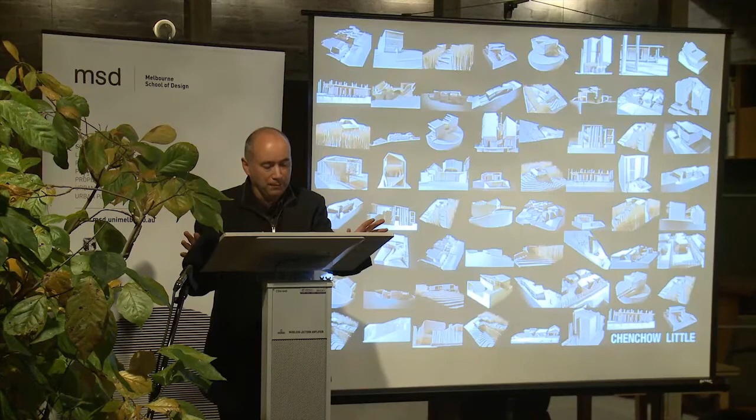Can you hear me? Am I projecting well enough? Yes. Okay.

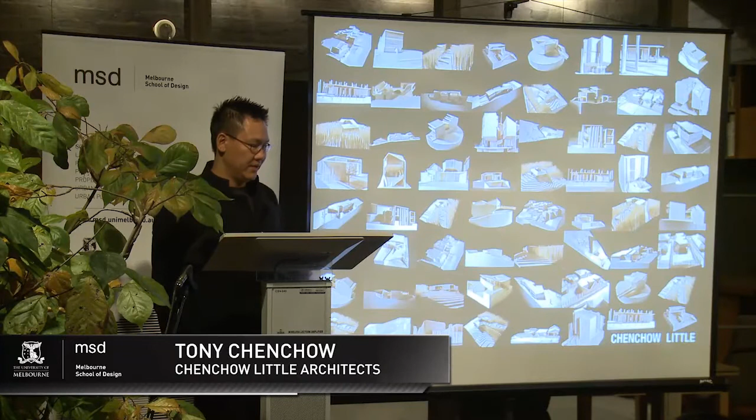I would like to start by thanking Philip Goad for the invitation to be part of the MSD series 2012. It gives me great pleasure to present this talk titled Loopholes, Mutations, Precedents, Three Aspects of a Small Practice. In the interest of finishing on time, I've woven the third topic of precedents in the other sections of the talk.

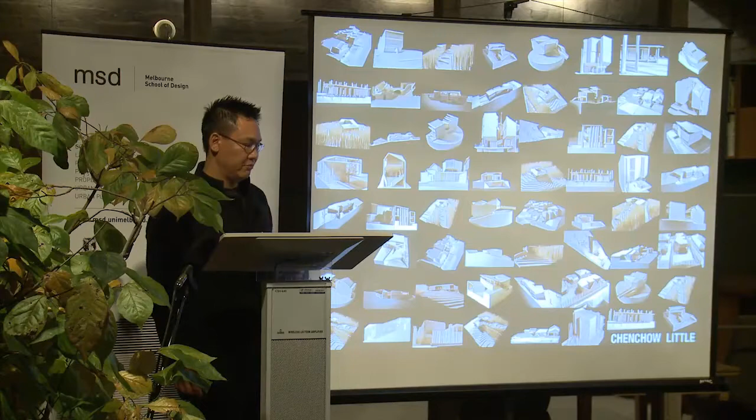Planning codes have played an important role in shaping our suburbs. As the majority of our projects are suburban houses in Sydney, I thought it would be appropriate in this first section of my talk to start with the impact council planning codes have had on our work.

In New South Wales, planning codes are divided into two sets of documents: local environmental plans, LEPs, and development control plans, DCPs. Planning codes are neither neutral or objective. I agree with Elijah Hughes, the editor of Perspective magazine, that codes charged with political, social, and formal intent operate as the architecture of architecture, creating its preconditions and shaping its production.

LEPs gazetted by the State Parliament are legal documents. They typically deal with zoning, subdivision, and heritage items. DCPs contain prescriptive guidelines such as wall heights, setbacks, envelope controls, floor space ratios, landscape areas, private open space requirements, as well as local character statements.

They do not carry the same legal status as LEPs. However, the weight judges in the Land and Environment Court have placed on them has increased over the last 20 years.

DCPs in Sydney have become a vehicle for council to impose and project their ideal visual image of the built environment. They have become de facto design codes.

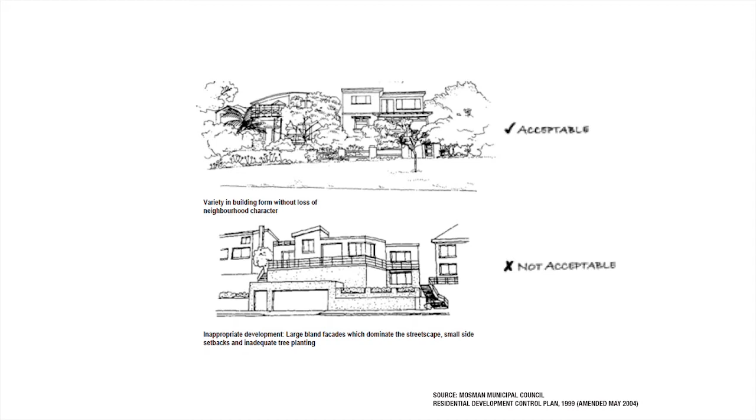Many architects and clients have challenged the codes in the Land and Environment Court. The example of Harry Seidler is well known, but my experience with the Land and Environment Court early in my career was not so successful.

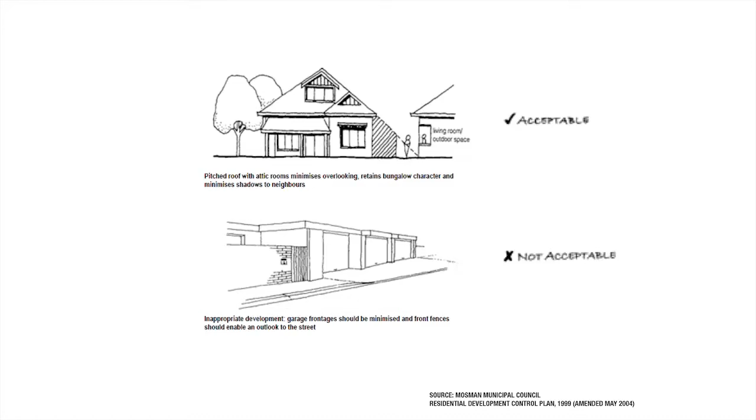I found that consultant town planners on both sides, as well as judges, would make ill-informed design amendments in order to facilitate a consensus. In one case, a judge proudly admitted that he had thought up the solution during his morning shower.

I quickly realised that a confrontational approach with council was not productive.

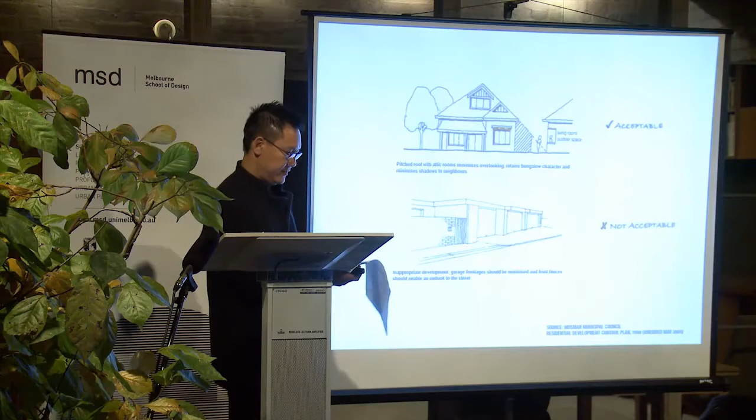We then tried to comply with the objectives of the code. In doing so, we made minor breaches in the numerical standards on the basis of compliance with the code's objective. This approach wasn't very successful either, as the planners were interested in strict compliance with the numerical standards.

We recognised that we needed to change our tactical approach. Rather than a confrontational approach emerging from a default reaction that planning codes restrict creative expression, we began to approach planning codes obliquely as a way of moving forward, trying to find openings in order to clear a conceptual space for design creativity.

In these four projects, we began with a careful reading of the codes, tabulating council requirements in order to locate points of complication.

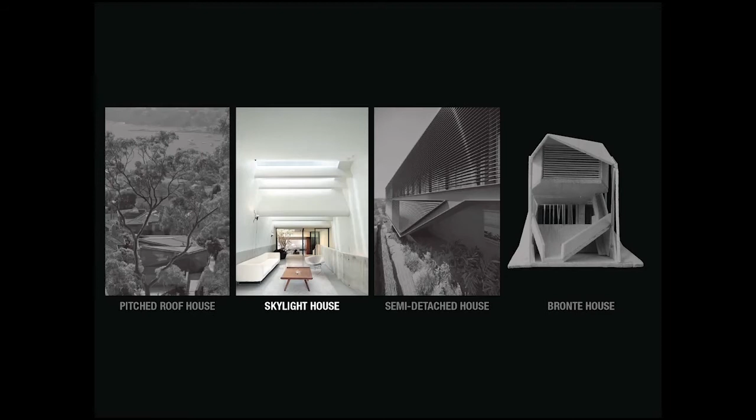In the Pitched Roof House, we highlighted the disjunction between council's ideal image and the written code. In the Skylight House, we changed the frame of reference and thereby overcame a previous assumption. In the Semi-Detached House, we looked at definitions in order to locate gaps in the way things are classified, as well as changing the frame of reference.

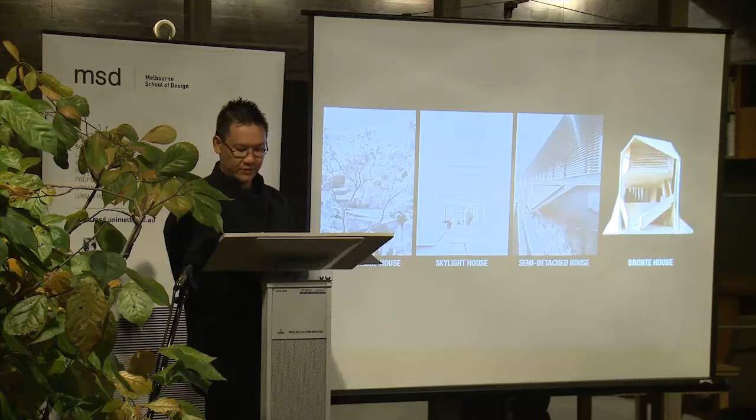And finally, in the Bronte House, we accepted the codes on face value and used them literally to generate a built form that was not previously imagined by council. Codes are therefore explored for their creative potential and as a vehicle to investigate contemporary architectural concepts.

In the Pitched Roof House, one aspect of the planning codes became the all-encompassing rationale that propelled the design beyond the rational limits of the code's original intent, a form of hyper-rationality. As Joshua Prince-Ramus states, a hyper-rational process takes rationality to an absurd level. It transcends all the baggage that normally comes with a rational conclusion to something.

Mosman Council is one of the most conservative councils in Sydney. Council planning staff indicated that the site was located in a very sensitive area and that compliance with the code, especially setbacks, view loss, and roofscape, will be important to obtain a planning approval.

A major component of the code required pitch roofs, as they were the predominant roof type of the area. This requirement is mentioned six times in the DCP under three different headings. The code even indicates that council may consider pitch roof forms to extend beyond the maximum building height, where the consistent pitch roof style is an important character element.

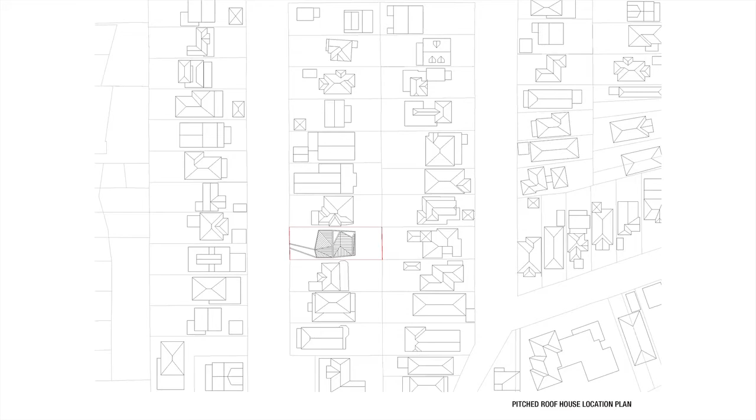Our response was to play with the disjunction between council's idealised image of the pitch roof expressed in words and the contemporary interpretation of a pitch roof. We realised by creating a point of complication, or conjuncture, we could comply with the codes and be able to explore contemporary design concepts. We proposed a roofscape that was made up of a series of triangles that not only pitched up, as in a traditional pitch roof, but also pitched down to form a faceted roof plane.

The scaling of the triangles was important, as we wanted to maintain a scale that was compatible with the neighbouring pitch roofs. This was essential, as there was a fine line between creating a roof form that integrated into the suburb's existing roofscape, while at the same time being an invasive modification of a traditional pitch roof.

Manipulating the faceted roof plane was not just a contextual or a formalist exercise. Other parameters needed to be addressed: the requirements for northern sunlight and the need to merge the roof with the orthogonal roof plan below it.

Surprisingly, the variability of the triangular geometry gave us freedom to push and pull the roof form as required to suit the various parameters. The triangular roof points align with the points of the orthogonal plan. The ridges and valleys follow the alignment of the sliding doors, so they slide without the use of horizontal transoms. Portions of the triangular roof were left out to allow sunlight into the north-facing courtyard.

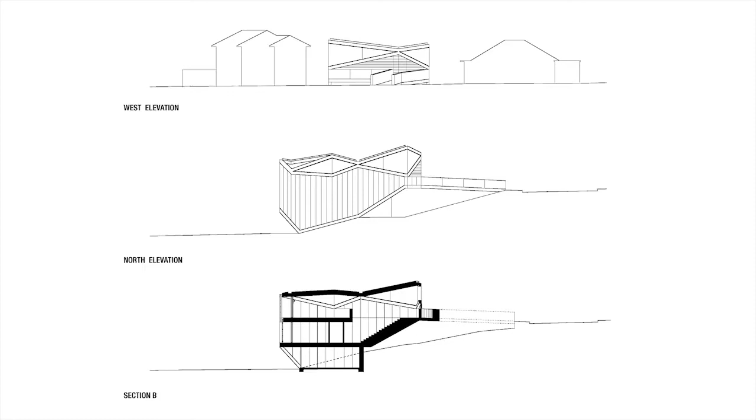The most important architectural move during the design process was to continue the logic of the triangular geometry from the roof onto the front and side elevations. The geometry became the basis for articulating openings along the side of the building.

The structural beams follow the geometry of the roof, continuing down along the facades. We realised that structure could also be a spatial device to organise the external and internal appearance of the house. Structure moves into the realm of ornamentation.

Sectional balsa wood models showed us that by highlighting diagonal beams, they became a strong graphic device that distorted the perspectival depth of the space. For example, the triangulation of the roof plane continues onto the wall, distorting the horizontal and vertical plane of the space.

The diagonals along the facade elongate the perspectival depth, while the triangulation of the corners flatten the perspectival depth. The plan form was fine-tuned to accentuate the aperspectival space.

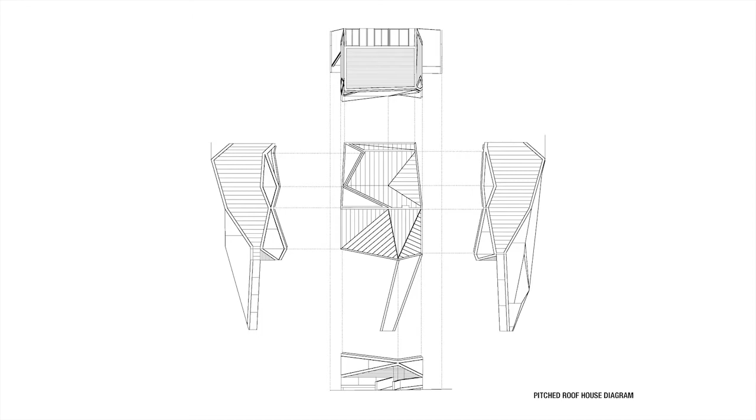The kink form also played on the disjunction between council's objectives of the code and the prescriptive requirements. The code required the setback to increase as the wall height increased. On a sloping site, council's prescriptive requirements resulted in a wedding cake form in both plan and section.

Rather than accepting the prescriptive building form stipulated by council, we splayed the building in plan and elevation. This not only avoided the dreaded wedding cake form, but allowed us to look at the building as a three-dimensional faceted object.

You can see from the design process of the pitch roof house how seemingly benign council code requirements have become a generator of ideas and concepts crucial to the final outcome.

The Skylight House plays on council's obsession with returning the front facade to its original appearance. Leichhardt Council is the only council I'm aware of in Sydney that has an in-house lawyer present in planning meetings.

The lawyer pointed out that an approval would not be granted unless the facade was rebuilt to the drawings of a heritage architect. After seeking legal advice, we realised that it would be more expedient to defer to Council's demand.

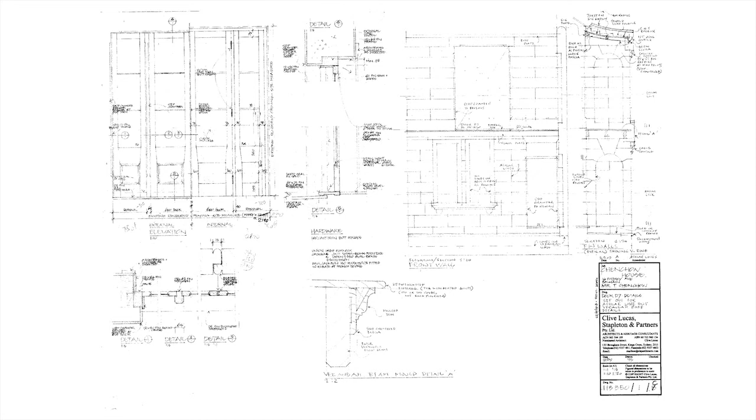The folded roof plane that delineated the internal spaces and formed a distinct skylight profile became visible from the street and the neighbouring houses.

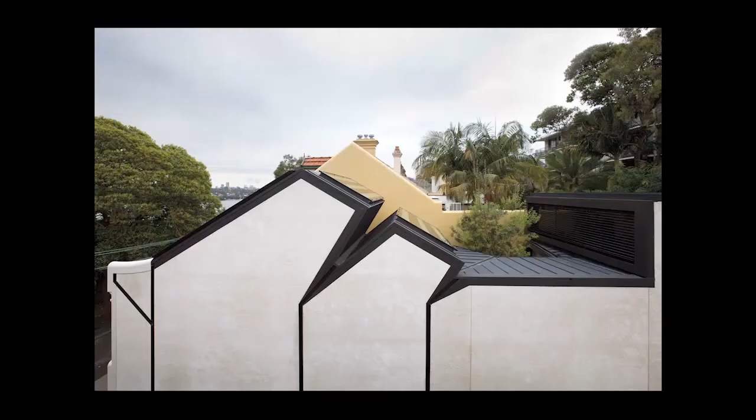This was explained to Council as a simple cutout along the side elevation that reduced the bulk of the building. Council surprisingly accepted the explanation.

The wall and roof cappings read as dark lines highlighting the skylight funnels and downpipes.

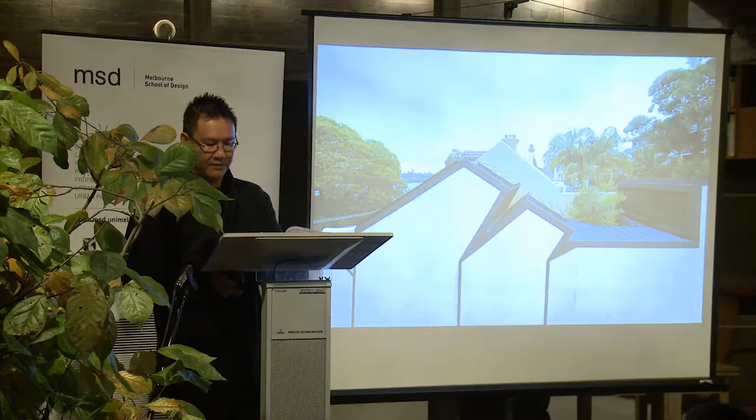The detailing of the wall capping and the ridge was an important element for integrating two heterogeneous elements, the side elevation and the facade. The side walls were finished using a stucco render rather than a flat render to continue the differentiation between the front elevation and the side of the house.

The height of the new wall capping matches the height of the original parapet of the front veranda. The zinc capping is folded up at an angle of 45 degrees to assist in weatherproofing and to form a small wing-like element.

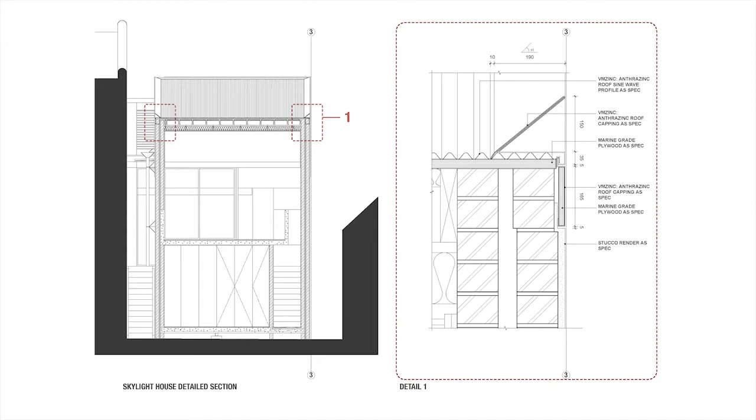This element continues across the ridge to act as a transition between the corrugated profile of the front roof and the standing seam profile of the rear skylights.

It was at the scale of the detail that we were able to reinterpret the historical front facade. The subtlety that was required to work at this scale gave us the ability to position the front and side elevations as equivocal and reciprocating elements.

Even though we deferred to Council with the front, we nevertheless wanted to create a building that at first glance may seem to fulfill Council's requirements. But if one was to take a closer look, they would notice that all is not as it seems.

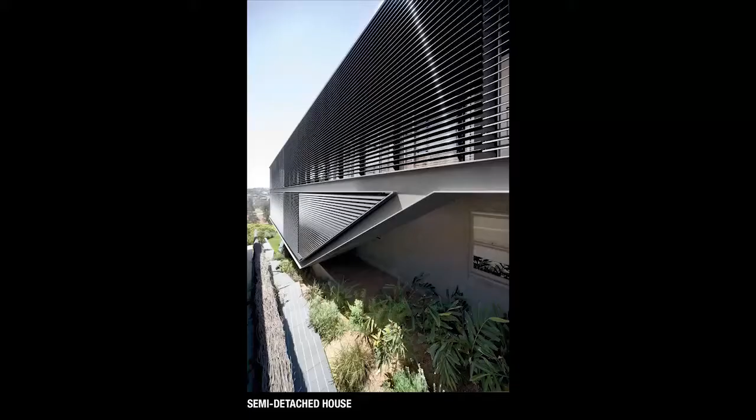In the semi-detached house, we played a game with Council's floor space ratio and the visual impact codes. The client is a merchant banker who wanted maximum return for his investment. He believed the best way to do this was to maximise the floor space.

The neighbouring semi established the volume of the proposal, as Council planning codes require semi-detached houses to be mirrored. The floor space ratio code was stringent, so our approach was to maximise the external spaces, as they were excluded from Council's calculations. Although we mirrored the enclosure of the building, we added a layer of external spaces around it to dramatically increase the perceived and usable space of the dwelling.

We began by removing the existing roof structure and the rear portion of the top floor. The existing sandstone basement and rough cast render base containing the bedrooms was retained.

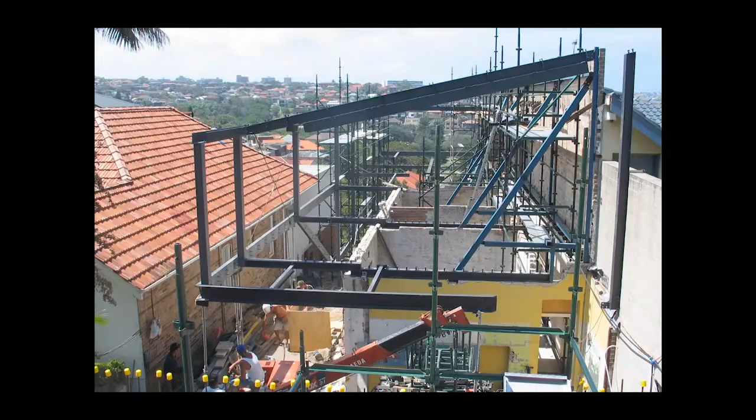We then grafted a new steel superstructure onto the existing base. The superstructure cantilevers past the base and contains living rooms, kitchen, master bedroom and extensive veranda and courtyard spaces. The kink form of the structure expresses a continuous external circulation linking the street entry to the rear garden below.

By positioning the external aluminium louver suite on the outside of the verandas and continuing the roof plane over, we created an interstitial space which dramatically increased the perception of the space while not being classified as floor space. The area of the interstitial space of the house is over 100 square metres, which adds 30% to the overall floor area of the house.

The council has since closed this loophole. Decks over 20 square metres are now counted as floor space.

The interstitial space helped us to strategise an alternate spatial model for a traditional semi-detached house typology. The space is made up of two operable layers. Each layer offers specific environmental, structural, spatial and aesthetic solutions. Here, aesthetics, sustainable and spatial considerations are inseparable.

Council stipulated that the facade cannot be longer than 12 metres without articulation. Council highlighted that window openings, changes in materials, and stepping of the wall plan in plan and section were acceptable forms of articulation.

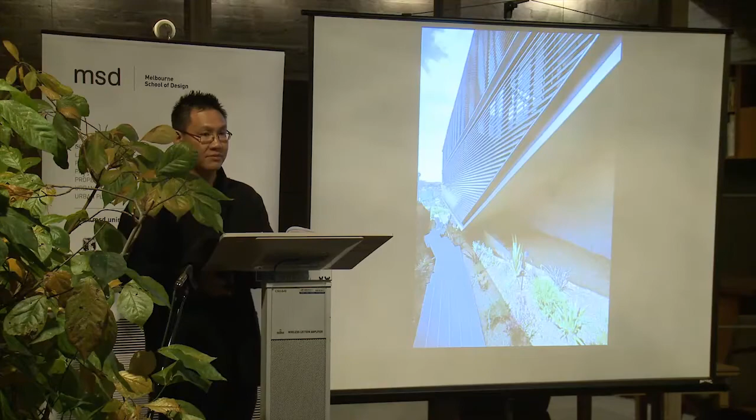We showed and explained images of Herzog and de Meuron's Ricola storage warehouse and Zumthor's shelter for Roman ruins, and finally managed to convince the planners that the two forms of abstraction were a difference in degree rather than a difference in kind. The two forms of abstraction were not opposites, but could be seen as an extension of each other.

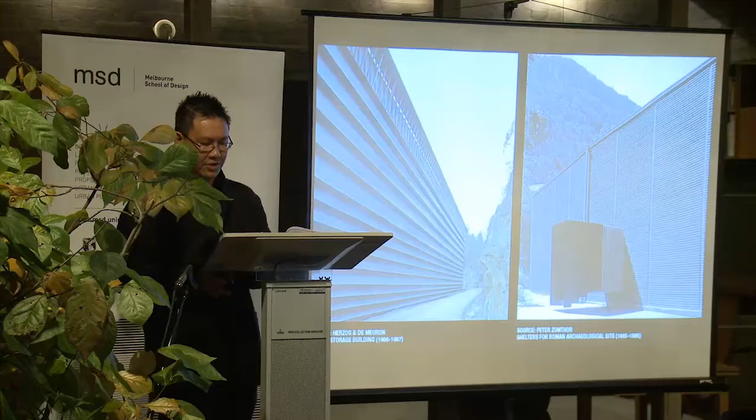Material abstraction emphasizes the capacity of the material to generate effects rather than the intrinsic nature of the material. This will be achieved through detailing and repetition to modulate the scale and intensity of the facade.

In the semi-detached house, material abstraction is explored by positioning the horizontal steel members and the louver blades in front of the columns to privilege the horizontal.

The edges of the louver blade are detailed to align with the flanges of the PFC. The PFC was painted the same colour as the louver blades to reduce them to the same visual order.

The viewer then reads the repetitive horizontal louvers in relationship to the flanges of the horizontal members and experiences the facade as a textural surface.

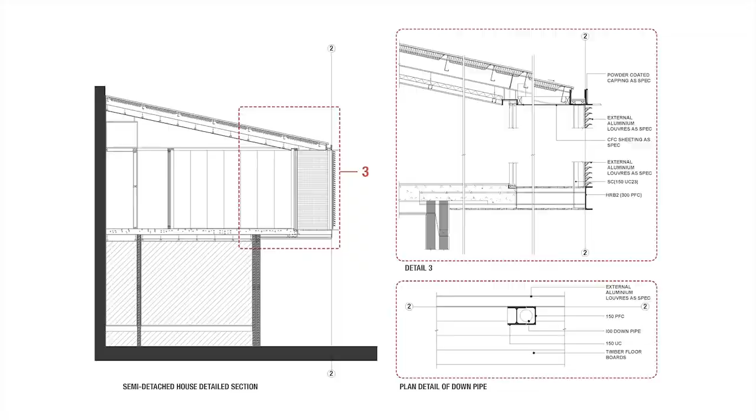To further reduce the image to an abstraction, scalable elements such as gutters and downpipes were incorporated into the steel beams and columns.

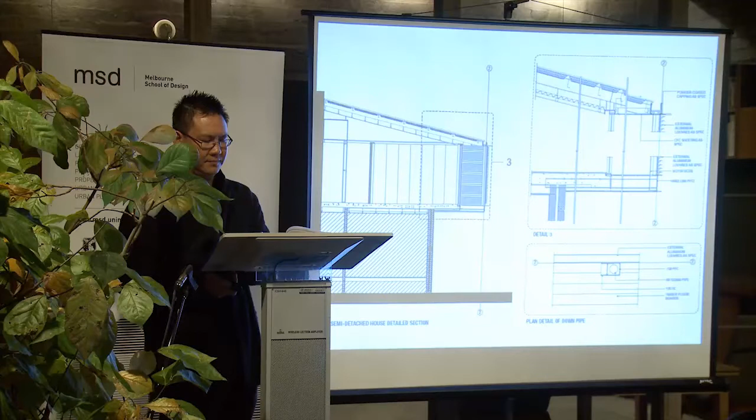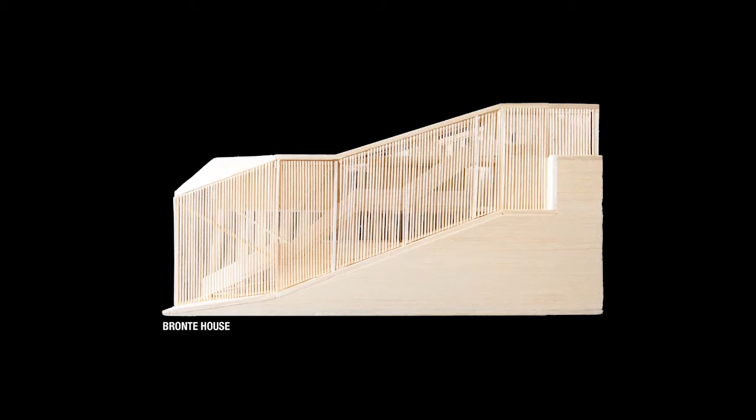In the Bronte House, which has just been approved by Council, the form of the house is a literal interpretation of Council's planning codes. The volume of the house is determined by the maximum permissible height, width and length.

The parapet line runs precisely 7 metres above the natural ground level along the length of the building. Where the wall height exceeds 7 metres at the end of the building, the wall tilts back and changes the material so it is classified as part of the roof plane.

Bedroom volumes have been inserted within the maximum building envelope, and the gaps between them permit natural light into the centre of the long, narrow space.

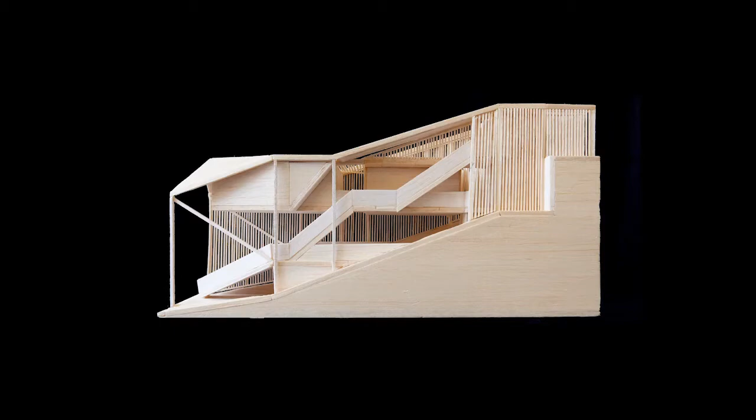The Bondi House continues our exploration of material abstraction. Here material abstraction is achieved by translucent glass panels set between closely spaced vertical glazing mullions, which provides the side of the house with diffused natural light. The vertical mullions and the supporting structure are designed to have the same visual order.

The elevation of the backyard registers the cross fall of the site and the impact of the envelope control. In the Bondi House, we have accepted the codes on face value, but have used them to generate a building form not previously anticipated by Council.

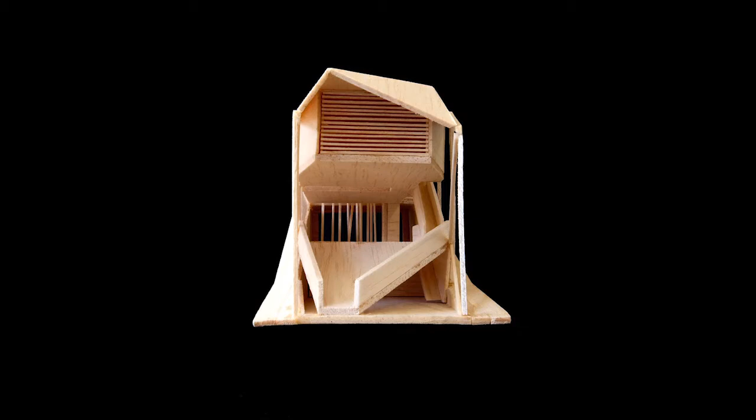Dr. Stan Fung of University of New South Wales offered the following analysis of our thinking. At one level of thinking, the fight against explicit requirements of the code leads us to focus on the ambiguities in the words of the code or in the relevant methods of reckoning and calculation.

At another level of thinking, the fight against implicit preferences of Council led us to form a rhetorical play in which we work with very specific gaps between the denotative, connotative, and metaphoric dimensions of key words, such as material abstraction. The crux is to apply a label that links council's design fetishes or values to a design decision or effect.

On a third level of thinking, consideration is given to the literal compliance of numerical codes. Here the aim is to give the appearance of total capitulation to the codes, while keeping one's eye firmly on the gap between the intents and the wordings of the codes.

These levels of thinking are relatively independent alternatives to each other, and are sometimes pursued simultaneously on an ad hoc basis as situations arise. Once engaged, the thinking is turbocharged by something akin to what Joshua Prince-Ramus calls hyper-rationality. The logic of thinking is projected relentlessly in a literal and straightforward way.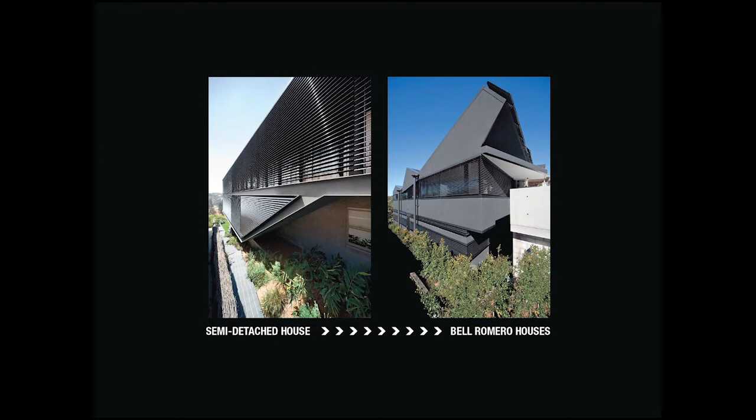The Romero houses are a mutation of the semi-detached house. The client for the Romero house engaged us after reading an article about the semi-detached house in Monument magazine. They wanted to duplicate the semi-detached house as they were proposing a new semi-detached development on their site.

The Romero houses are located in the same local council as the pitch roof house. The main triggers for the mutation were the conservation streetscape and changes in the environmental rating tool, BASIX.

The tug of war with the client started early in the design process. We initially presented the sketch design to the client without a central courtyard to address their tight budget. The client was very upset as the semi-detached house had a courtyard and they believed that their development would not be the same without it.

They also wanted to keep the horizontal louvers, dark grey exterior and end decks.

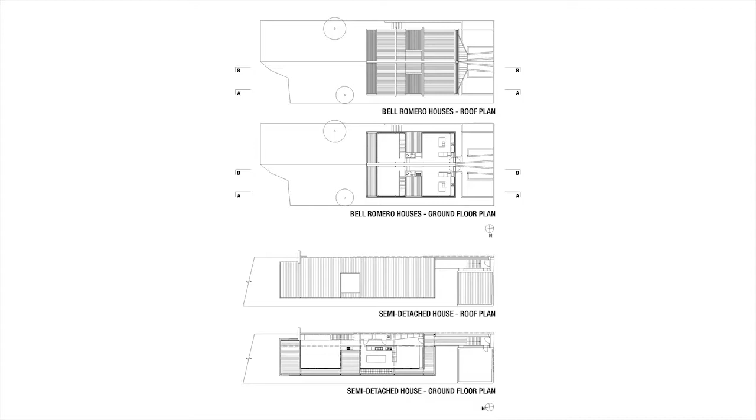We did, however, convince them to explore an alternate roof form. We explained that unlike the semi-detached house, where the roof form needed to mirror the neighbouring semi, we now had the opportunity to build a completely new roofscape.

We played a similar game with the roofscape as we did in the pitch roof house, but because the site is located on a conservation streetscape, it resulted in a different solution. The roof form is designed as a series of connecting gables reflecting the predominant roof type of the area.

We developed a strategy in section, where the interconnecting gables are experienced internally as a folded roof plane that zigzags down the site. We integrated split-level floor plates into the section to prevent the rear portion of the house from breaching the maximum wall height.

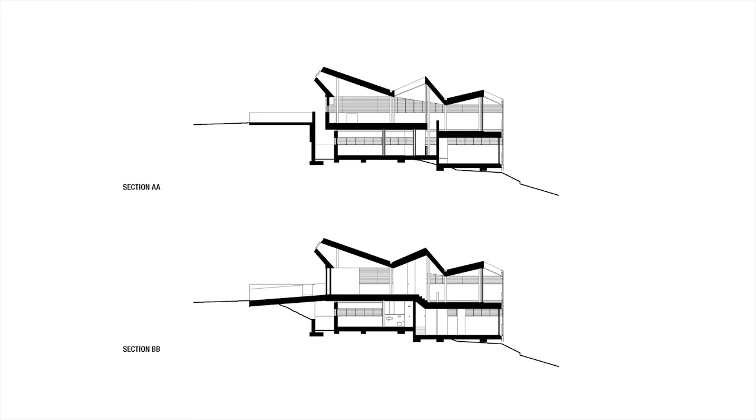From the street, the dwellings were designed to continue the step form of the neighbouring houses. We've reinterpreted the traditional gable as two louvered west-facing skylight funnels pitched towards the street.

Changes to BASIX meant that we had to reduce the amount of glass in our designs. We couldn't replicate the layered facade of the semi-detached house as it required too much glass. We had to develop a new facade system that considered the inclusion of solid walls and also took into account the split-level arrangement of the houses.

The aim was to explore the affective potential of integrating solid sections into a louvered facade to elicit a singular and clearly defined expression. We developed a system of solid and translucent horizontal banding along the facade, which disguises the location of the split floor plates, courtyards and decks.

The banding provides a scaleless and consistent graphic device across the exterior of the building. The louvers are detailed flush with the solid bands, hiding the internal supporting columns. This privileges the horizontal and heightens the sense of lightness.

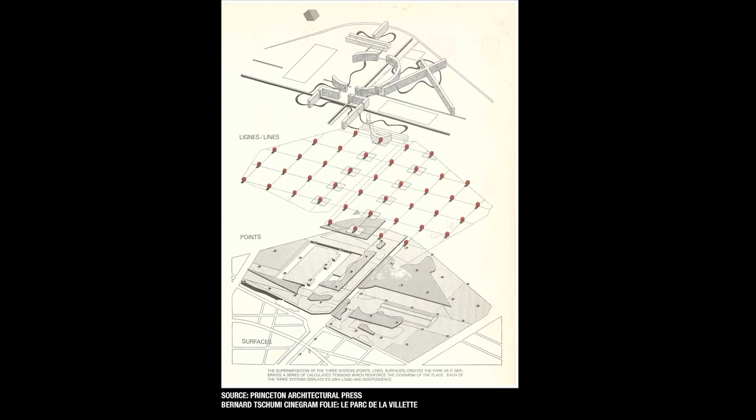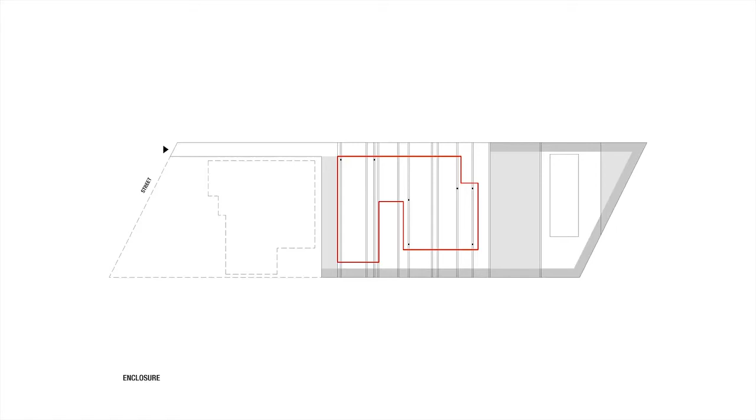The third layer is a series of glass sliding doors that delineate the actual enclosure of the house. They are arranged around a north-facing courtyard. The doors are able to open from the corners and be configured in multiple combinations and permutations to allow a variety of circulation patterns across the whole site.

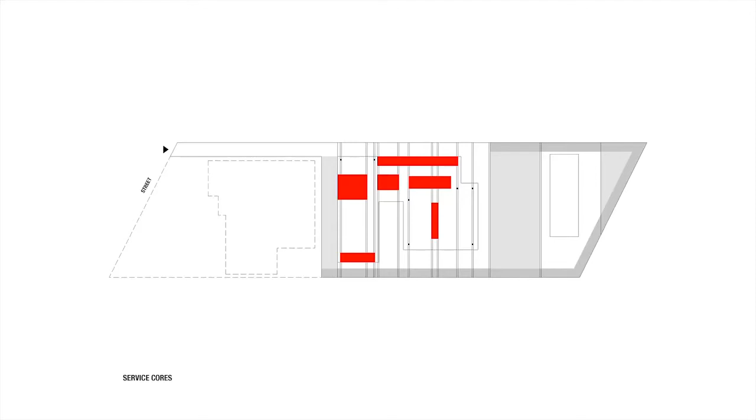The fourth layer is a series of cores containing a powder room, kitchen, bar and staircase that spatially delineates the ground plane. The cores are clad in timber veneer, so they are interpreted as joinery items, disguising the fact that the cores also act as load-bearing elements.

We arranged the cores to encourage circulation patterns and spaces to flow and orientate not only along the site, but also across the site.

When you enter the house, you're obliged to turn several times around the cores. The view of the garden and living spaces gradually unfold with each turn. This type of planning departs from a traditional suburban house layout by offering a systematic multiple paths along the ground plane, rather than a singular defined corridor.

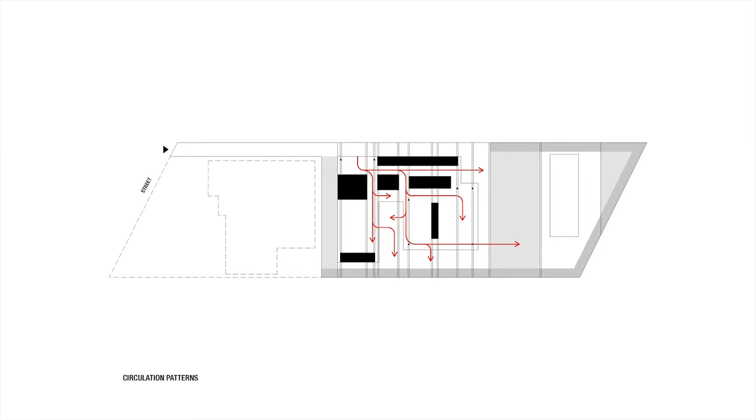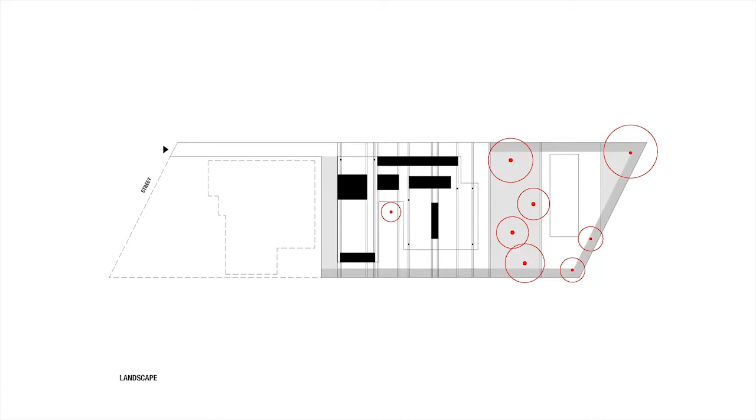A Japanese maple tree was positioned in the centre of the house. The client specified the tree specially to register the change in seasons.

The sixth layer is a series of curtains that follow the alignment of the enclosure. Depending on the arrangement, the curtains modulate the degree of enclosure of each space, and the enclosure's relationship with the garden, as well as other spaces across the courtyard. This addressed the client's brief for a continuous space that could also be compartmentalised.

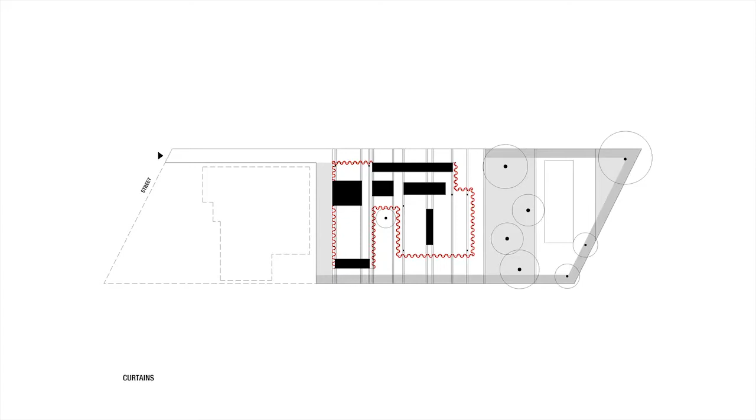The final conceptual layer is the bedroom volume, which floats above the abstracted ground plane.

The Freshwater House is a mutation of the Szirtes House. The clients for the Freshwater House visited the Szirtes House and wanted to replicate the planning as it provided adaptable and permeable living spaces. The triggers that mutated the Szirtes House into the final Freshwater House design were the topography of the site, ocean views, the public nature of the site, and the planning precedents set up by the neighbouring properties.

The site slopes up from the street frontage and has a steep crossfall. This enables the house on the site to view not only back over the street frontage, but also over the side of the neighbouring houses.

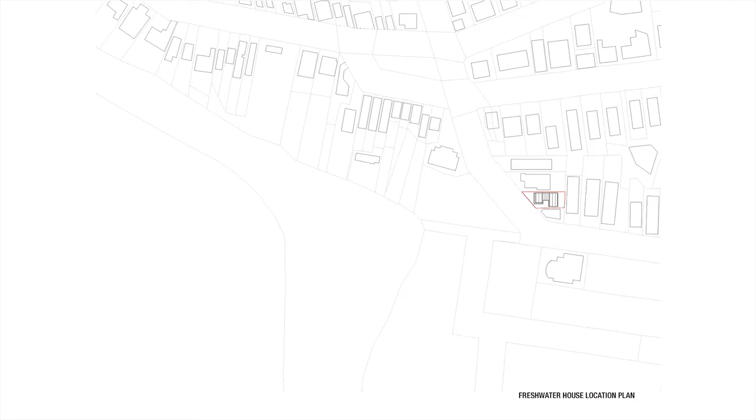Council had recently approved 2 new houses on either side of the property that dealt with the sloping site by designing a podium to artificially level the site. We continued the podium into our design as it provided a solution that would help us adapt the Szirtes House to the sloping site.

The design of the Freshwater House had to address the double orientation and the northern sun. The service cores were repositioned from the Szirtes House to respond to this. The planning strategy was flexible and easily modified to suit the specific new site conditions.

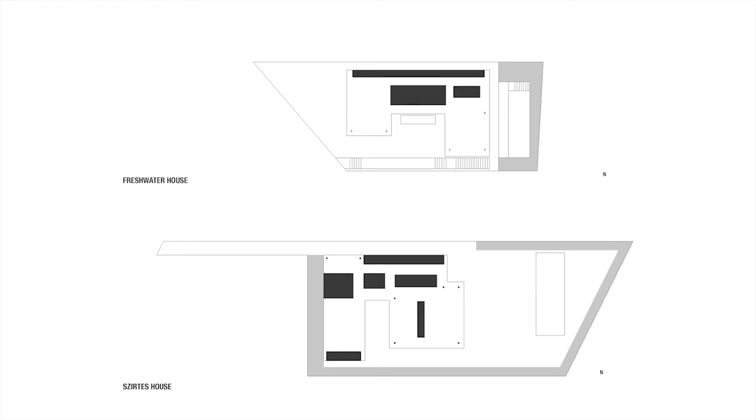In section, the design was therefore made up of 3 distinct horizontal parts, each with their own particular spatial experience. The podium excavated into the slope is deliberately cavernous and dark. It contains a garage and living space and aligns with the podiums of the neighbouring properties as required by council.

The living space is sandwiched between the podium and the underside of the horizontal volume. It's a horizontal void, transparent, almost invisible, full of light, half inside, half outside. And finally, the top veiled volume is a serene, translucent space for sleeping.

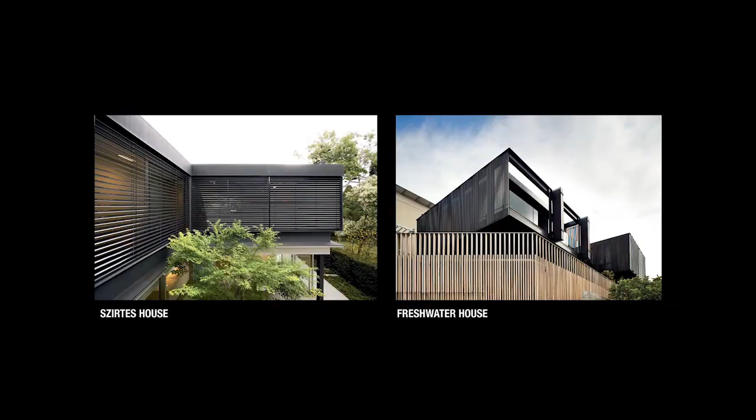The detailing of the floating volume differs from the Szirtes House to the Freshwater House. They directly respond to the different site conditions and a different structural system, resulting in 2 completely different interpretations.

In the Szirtes House, the edges of the bedroom floor slab are folded up to form a composite concrete and steel beam. The beam is constructed of a half metre high fabricated steel channel. The hybrid beam enables the floor slab to span up to 8 metres between the columns.

The top of the sliding doors and the curtains continue past the ceiling level to connect with the bottom edge of the steel channel, so that they cannot be seen from inside of the house.

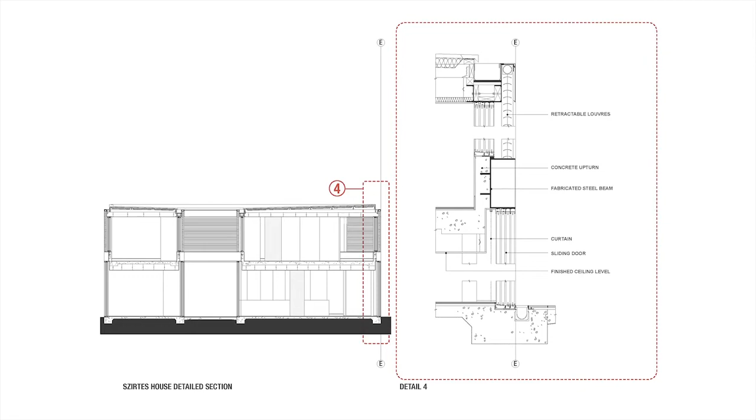Externally, the viewer reads the thin edge of the flange against the scallop of the steel beam. The shadow created by the scallop enables you to read the exterior as 2 stacked volumes. The heavily engineered beam is therefore detailed to appear light.

The steel roof structure sits within the depth of the louvered pelmet. A proprietary retractable louver system which modulates the sunlight and provides privacy to the bedroom volume sits between the pelmet and the top of the steel beam.

In the Freshwater House, we were unable to use an off-the-shelf horizontal louver system like the Szirtes House, due to the higher wind ratings required at the beachfront location. We instead designed a custom-made screen. This had a direct impact on the detailing and the appearance of the bedroom volume.

Anodized aluminium sections were chosen for the screens. The battens were arranged vertically rather than horizontally as in the Szirtes House, to privilege the vertical dimension of the view so the occupant can view the sand, ocean and sky simultaneously.

The spacing of the vertical battens was very important to the overall effect of the screen. A number of prototypes were made on site with battens at different sizes and at different spacings. This process was very important to finally tune the balance between view and privacy and to attain an appropriate level of translucency.

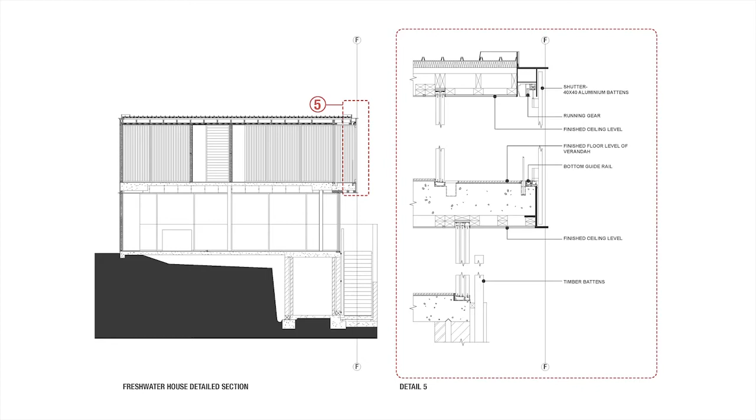As the shutter opens, the structural system of the building is revealed. When fully open, the battens that make up the shutters are designed to line up with each other, forming a figurative T at the corner of the building.

This is a play on Mies van der Rohe's cruciform corner detail. By adjusting the motorised bifold shutters, the occupants can directly control and modulate the amount of privacy, enclosure, sunlight, and also frame views.

By tuning the internal spaces, the occupant also modulates the external appearance of the house. Externally, the house represents the occupant's mediation of the environment. Here, representation is intrinsic to the form of the building, rather than gestures that an architect stylistically composes and applies on the facade. As the occupants can stop and start the shutters in any position, the appearance of the house can have a multitude of permutations and combinations.

Therefore it isn't completely scripted by the architect. Following the same logic of the batten screens, we decided to line the podium wall with vertical timber battens, which continue up to form the handrail. We chose timber battens as they will weather differently to the aluminium sections of the bifold shutters.

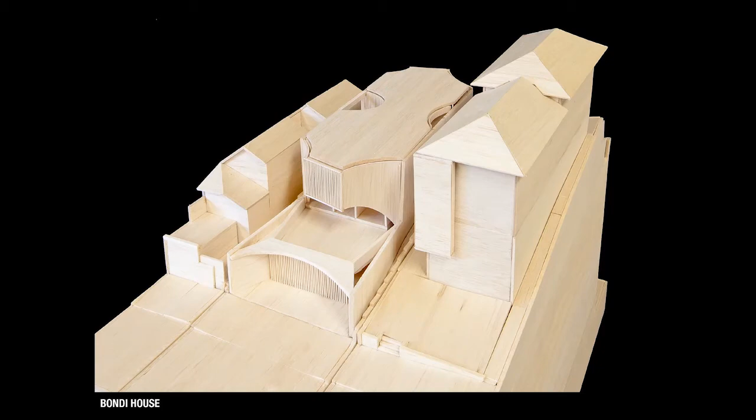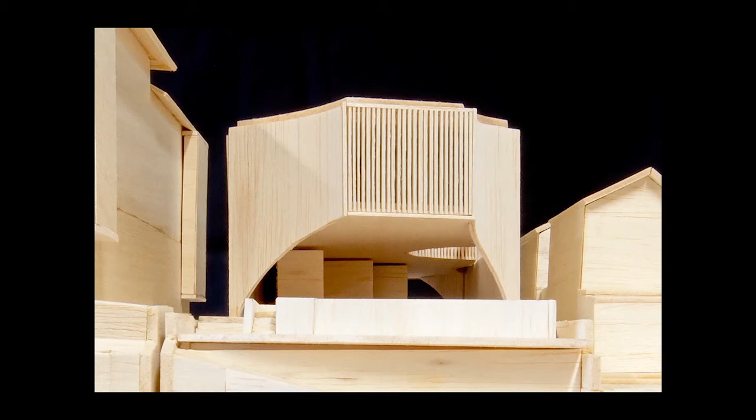Parts of the bedroom volume were pulled back from the side walls to create light shafts. A curvilinear geometry was employed to orientate the bedroom lenses to the sun and view. Unlike the Szirtes House and the Freshwater House, where the bedroom levels were supported by columns, in the Bondi House, the bedroom level is supported by side walls which scallop in to deform the first floor cantilever.

Even though the client wanted to replicate the Freshwater House, with each presentation meeting we highlighted the constraints of the house and were able to mutate the Freshwater House beyond recognition. It was a long but essential process. If we had presented the final scheme in our first meeting, I don't believe the clients would have accepted it. The fact that we were able to demonstrate an evolutionary process through a series of models meant that the client was able to partake in the process and develop a sense of ownership with the final design.

By way of conclusion, I offer you another quotation from Stan Fung. The logic of loopholes highlights the opportunistic nature of design as performance. It is outward looking towards attendant forces, social, legal and otherwise, beyond our control. The logic of mutations is played out over a broader temporal framework and allows difference and repetition to be played out over a number of years in the life of an office.

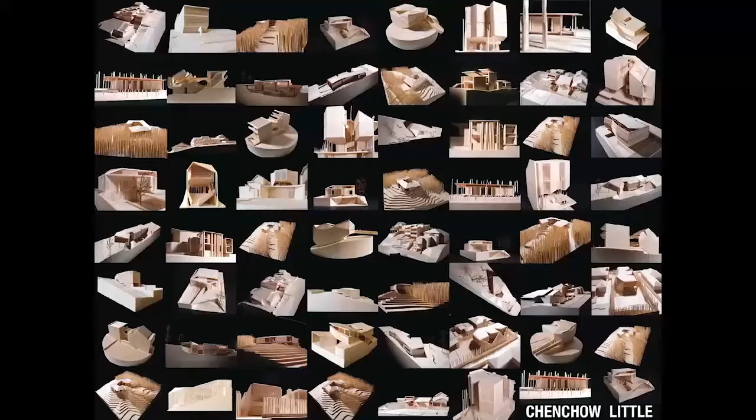In other words, both kinds of logic allow a place for conventional values of a profession, such as fine detailing, but do not give them priority over other forces at play. Both kinds of logics are concerned with clearing a conceptual space for design creativity without ever signing over substantial portions of initiative to eye-catching developments in computer software. Thank you.

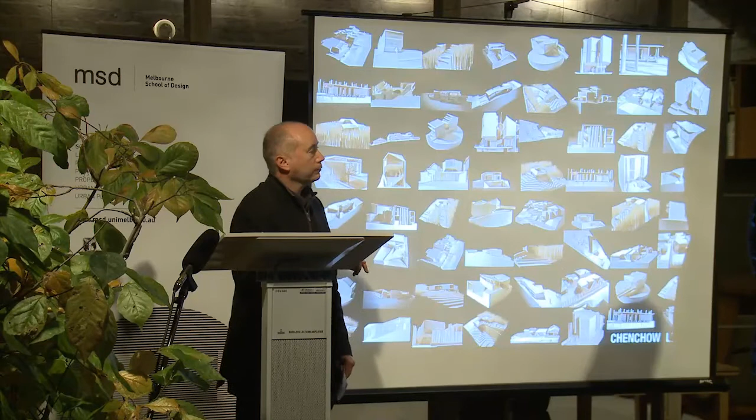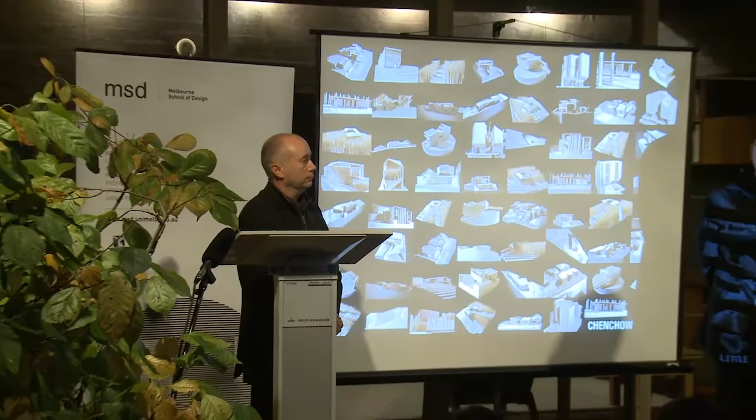We do it quite early in the process, and we've become quite familiar with the codes at different councils in Sydney, so we know, if a house is located in a particular council, what sort of games to play. Even when we present the sketch design to council, we employ those games at the very beginning. If you leave it later on, I think it's too late. I'm not sure how the Victorian system works, but we don't have an appeal system in the state of New South Wales. The appeal system is normally the Land and Environment Court, and by that time the client has spent an awful lot of money with lawyers and expert witnesses, so we try to avoid that.

Yeah, Fiona. So you have a lot of clients that come to you and say, we want the same as that project. What's your initial response to them?

We smile. I can understand why - clients come to you for different things, and I think they feel a certain degree of safety or knowing what they're going to get when they refer to a previous scheme. The opposite side of the coin is that we've also lost clients because our projects are so different from each other, and they would rather go to another architect who designs the same house over and over again. I think it really depends on how adventurous the client is and how much surety they want. Some clients don't want to be left naked, not knowing what they're going to get, and I understand where they're coming from, but we try by stealth to mutate the project, because I find it quite boring just repeating the same thing over and over again.

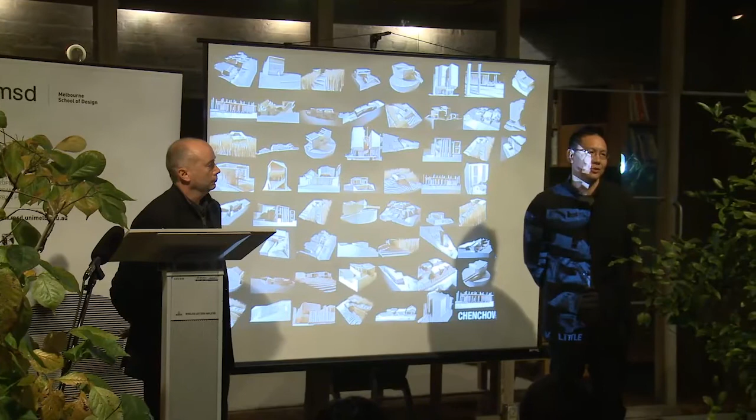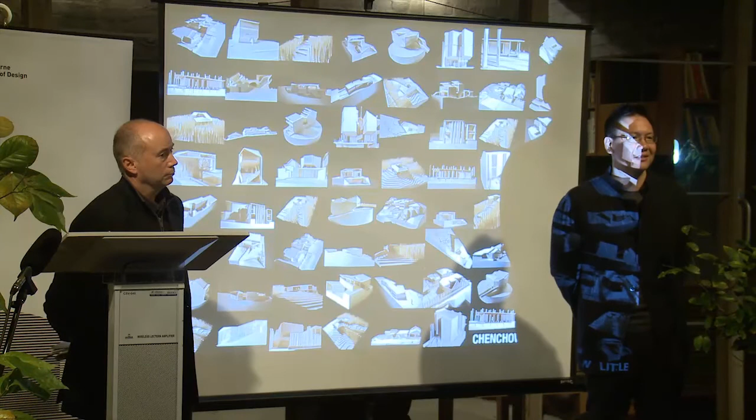No, I think people have different takes on things, and town planners are generally conservative people. For them, it's very much applying abstract codes to a specific site condition, and they're very much concerned about the size or bulk of the house and its effect on neighbouring properties. There's a public value to the code there. They seem to have a default reaction where the bigger the building, the worse it is, and that loophole was closed up quite quickly. Not because of us—there were other architects doing it.

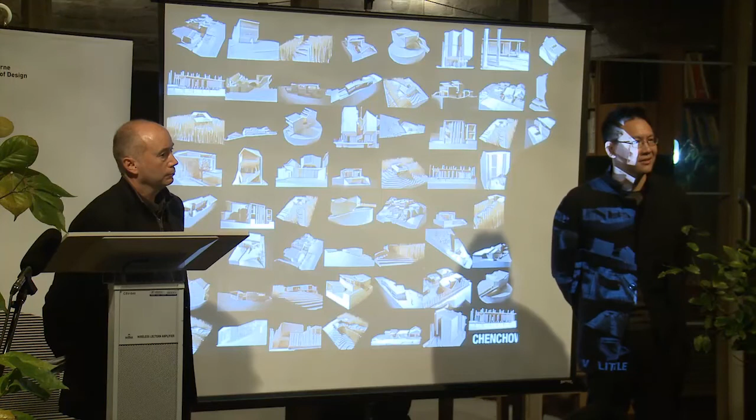In a different manner, so I can't pat myself on the back and say I've changed it, but we've changed it. I suppose the question is about them understanding that you can interpret some of the prosaic conditions in a more creative way—that they couldn't see the good or the benefit in some of that. No, because they don't know how to interpret the image or the building. Unfortunately, they don't have the sort of design education that architects do.

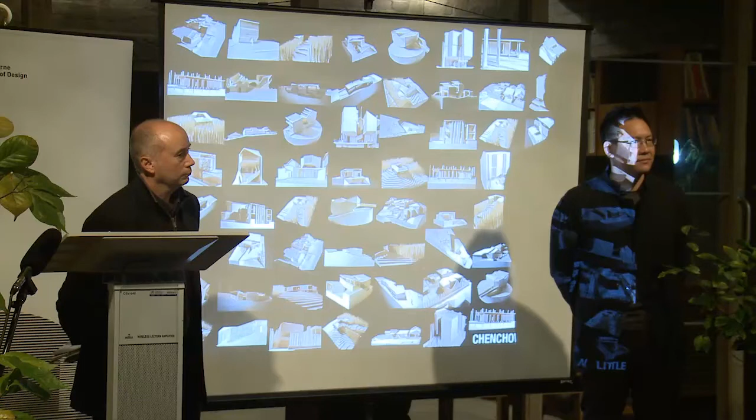But couldn't your house become a new typology? Couldn't you see it pictured in a future planning code? I'm joking. Yeah, no, it'd be horrible to have that repeated, but no.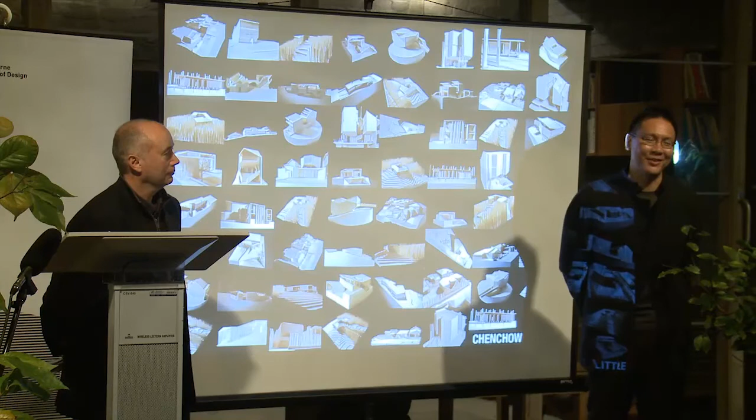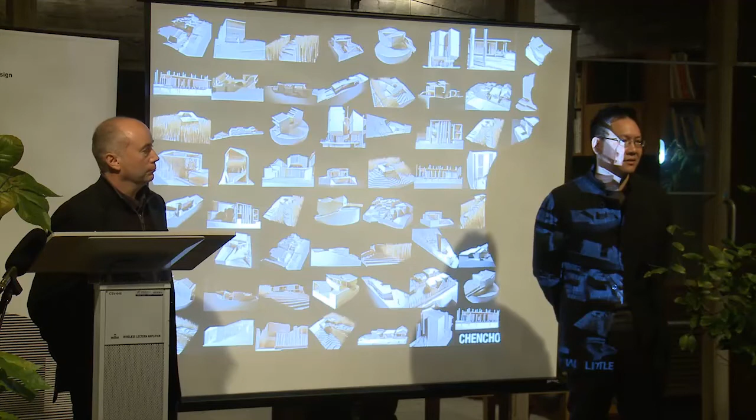They're very much divorced from the process. They approve something, and then they don't look back at what they approved. They don't look at the results of their approval system. So the codes aren't really evolving. Your houses were evolving each time, but the code is a static thing, sort of stuck in time. It is stuck in time, but every year certain clauses get tightened up. And it's always tightened up—it's a very negative way of looking at things.

But strangely, certain other loopholes get opened up. Quite recently, the State Labor Party, before they lost government, passed a regulation that voids across all councils would not be included in the floor space ratio for houses. It's quite an amazing turnaround. I think their argument was that why should somebody with a sloping site be penalised for having split levels or staircases? They thought it was a fairer thing.

That loophole, the voids, we actually utilised in the Bondi House, because the volume is very much 50% void and 50% floating bedrooms. So they don't just tighten up and cut loopholes—there are other things which open up at the same time.

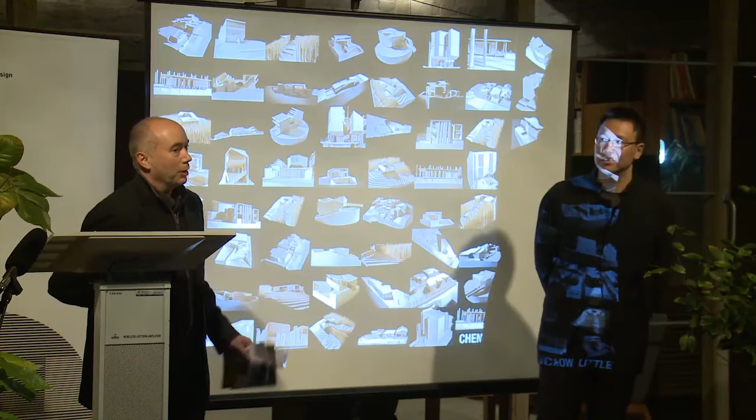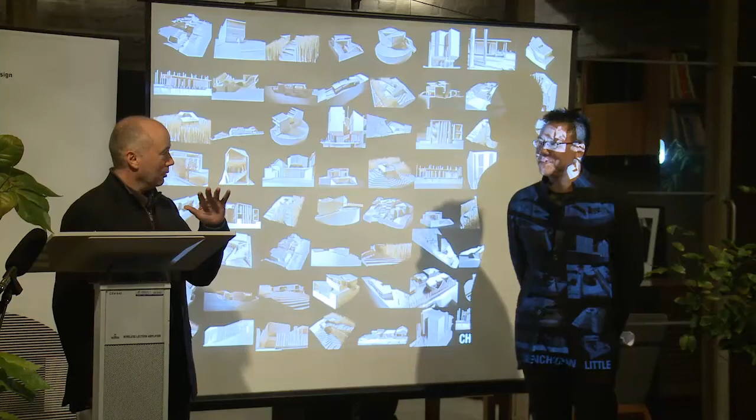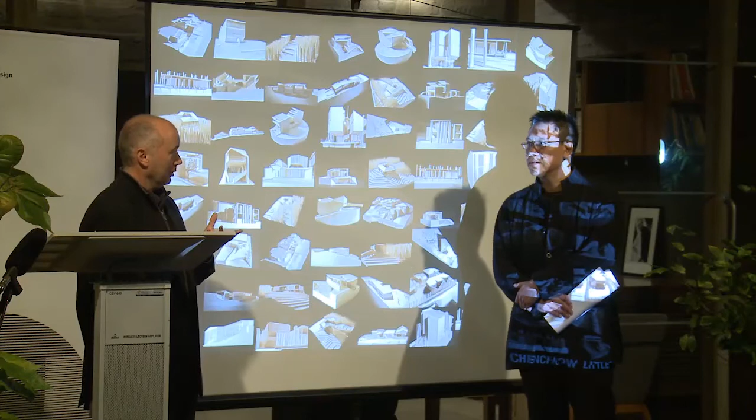Tony, I was going to ask about Sydney generally, because it's been very much a Sydney context for planning, and the regulations and codes seem to want to constantly control—you said they want to constantly tighten it. So is there an unspoken agreement amongst all these municipalities to somehow limit development as a way of Sydney not becoming more dense, or is there some economic rationale? Because the regulations are labyrinthine—they ensure that the process of achieving a building is long, difficult, and extended, and that invariably a client, particularly for a residential commission, has to outlay an enormous amount of time, patience and money.

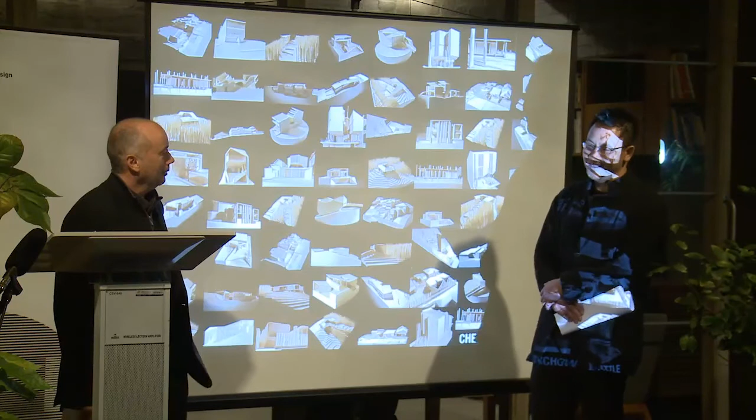What do you think? This has preoccupied Sydney architects ever since Harry Seidler started practicing here. Sydney architects have always bemoaned the state of planning in Sydney. I don't think it's the same atmosphere here. I heard it's quite different, and I think it comes down to the conservative nature of the constituents, the people who live in the council area. The codes are very much a product of their reaction, and I think codes are quite reactionary, in that they benefit or lean towards the objector rather than the applicant.

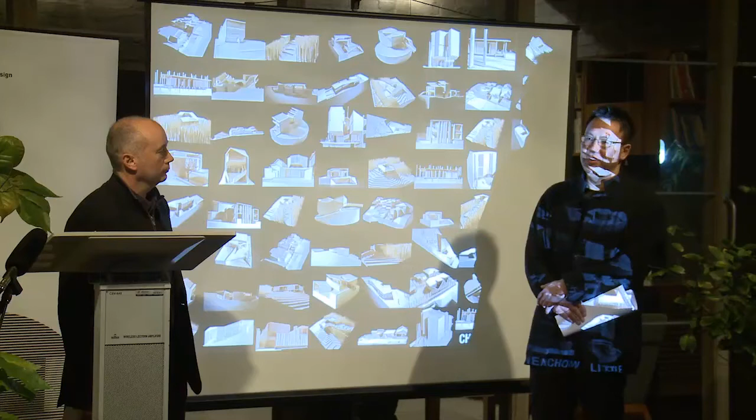You get councillors voted into council on the platform of being anti-development, and then the next thing they do is employ a new town planning company to redraw their codes. Increasingly you get a lot of independent mayors or green mayors who aren't affiliated to Labor or Liberal, and they also come in on an anti-development platform. You can understand where they're coming from - they're there to restrict development, and to restrict the size, the bulk, and the density.

But I think the way the codes are written reduces everything to a common denominator, and in some ways it stifles design excellence. I'm not sure whether they understand that. No, but it seems to be a self-regulating form of control and a slowing process, whereas if things were more relaxed, would things really get out of hand? I don't think so.

It also comes about because property values in Sydney are increasing at a rapid rate, and certain objectors can lobby councillors quite well. You get situations where a neighbour would object to an applicant's plan through their lawyer - they wouldn't go and knock on a door and say 'I object because of such and such.' They'd straight away employ a lawyer and an independent town planner, and send letters to council. So it's all quite serious and expensive stuff. I'm not sure why they do that in Sydney - maybe they do it in Melbourne too, but generally the more affluent the area, the harder it is to get things through council.

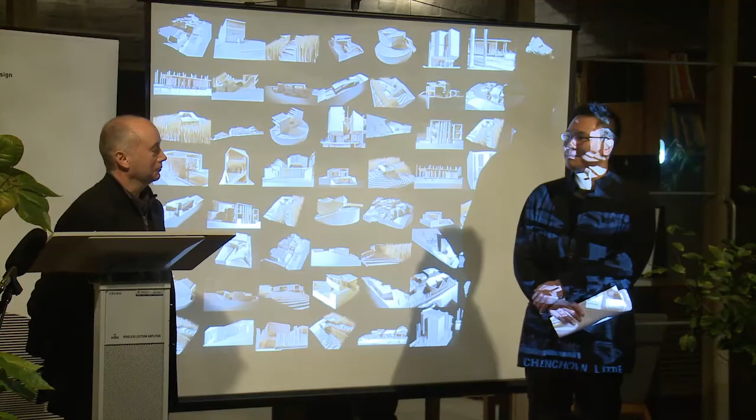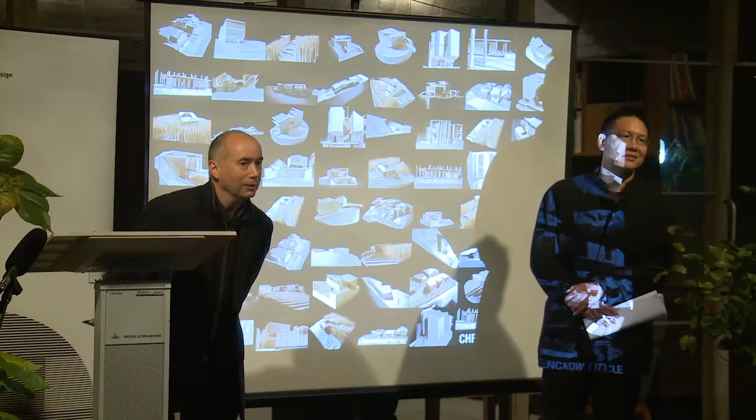Well, any final questions for Tony? Yes - the Skylight House. I was intrigued that the front building was demolished and then restored back to its original form. In that process, how clinical were you in actually restoring it to the Heritage Architect's specification, and where were the points where a line was drawn on certain elements?

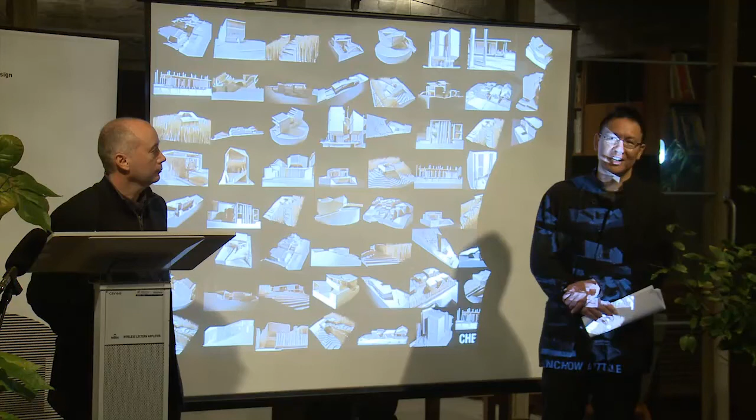Council only wanted the elevation drawing from the Heritage Architect, so we hired Clive Lucas Stapleton and said to them, only draw the elevation and nothing else. Council approved that. Clive basically went on site, photographed all the castings, and when we demolished, the builder was very careful in taking the castings and storing them in a safe place. We restored it back to the existing facade, or even better, because Clive had his own take on certain things, even down to the moulding around the windows, though the windows were replaced in the 70s. So what Clive did was walk up and down the street taking photographs and measured drawings of the neighbouring houses.

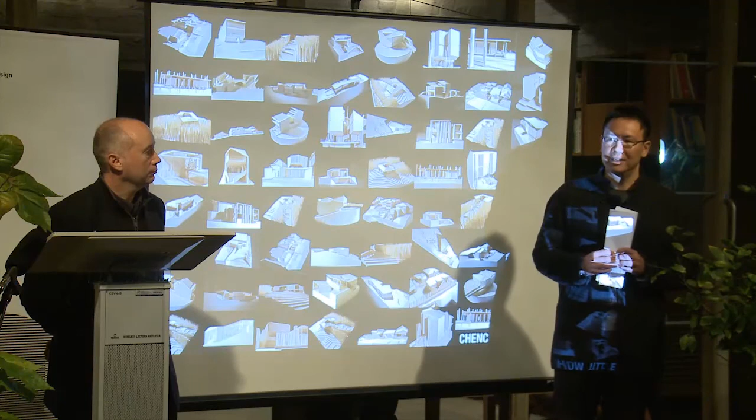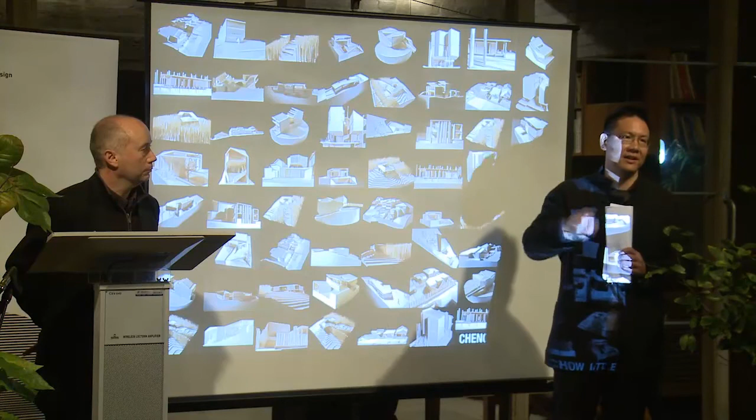Council wasn't concerned, and Clive always chuckles at it - he had no impact on the inside of what was behind the facade. So the difficulty was trying to bring the two together, and we struggled with that. That design took about a year to work out. We looked at people like Carlo Scarpa and how he did it, because we didn't want the facade to just be a token gesture or a skin where the interior had just been taken out. So it was a long and arduous process, but for the front facade we had to do what the Heritage Architect wanted us to do.